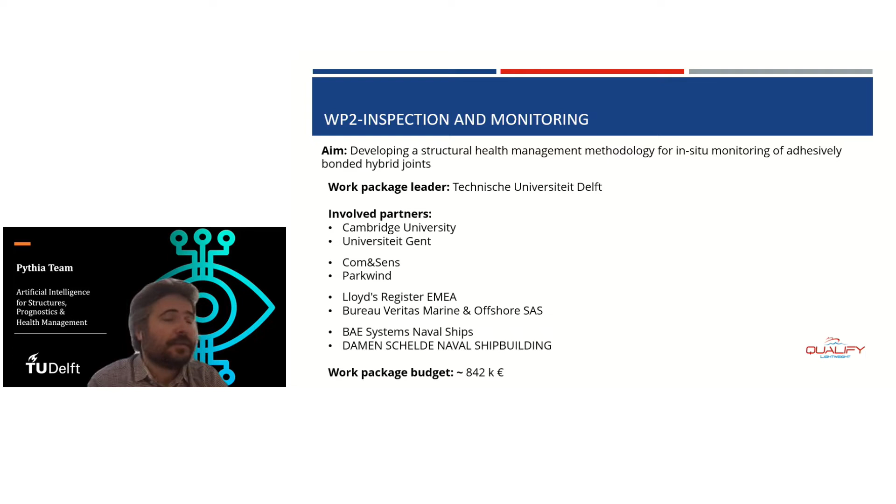So I would like to start the presentation by presenting, for those not familiar with structural health monitoring, the four different levels that exist. In the first level, what we are trying to answer is the question of whether there is damage, yes or no - this is what we are trying to do. On the second level, we also try to add the severity of damage.

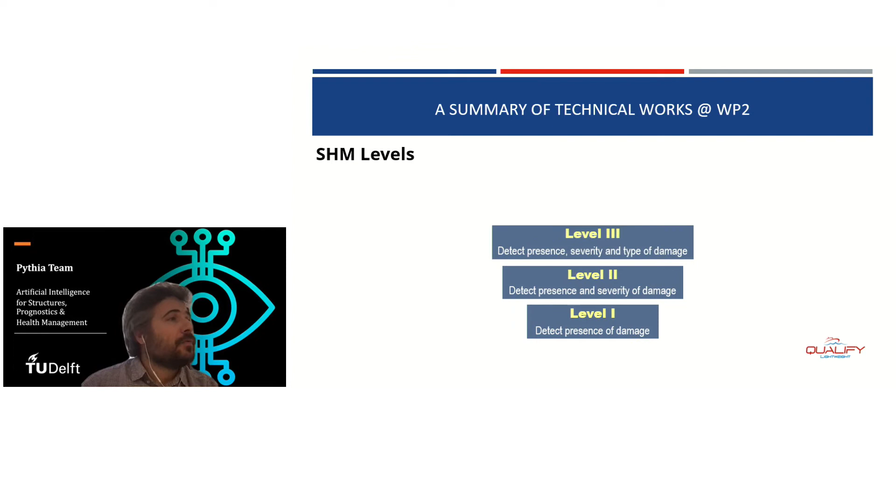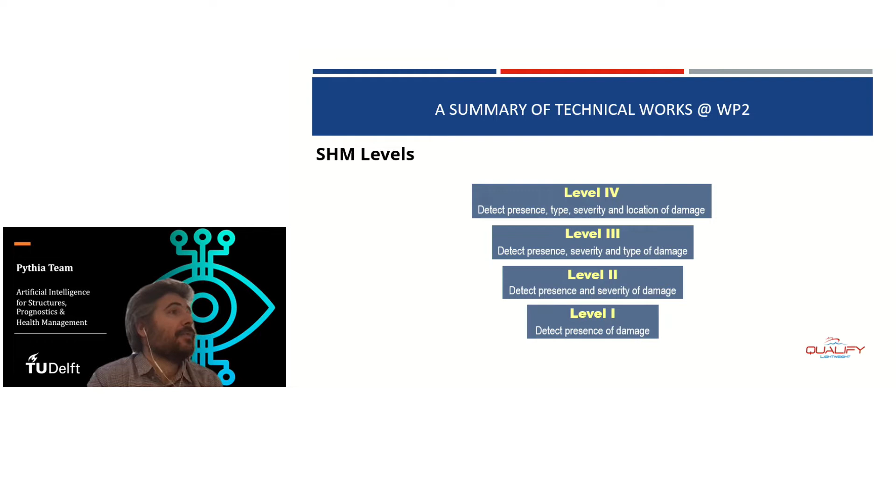As we go to the third level, we would also like to identify the type of damage. And of course, the last one, which can conclude the goal of SHM, is that as long as we're talking about the structure, we also need to find the location - that's also very important. So these four types - answering if there is damage, the severity, identifying the damage type (we're talking about a composite structure with many different materials), and the location - are the four levels we are trying to achieve here.

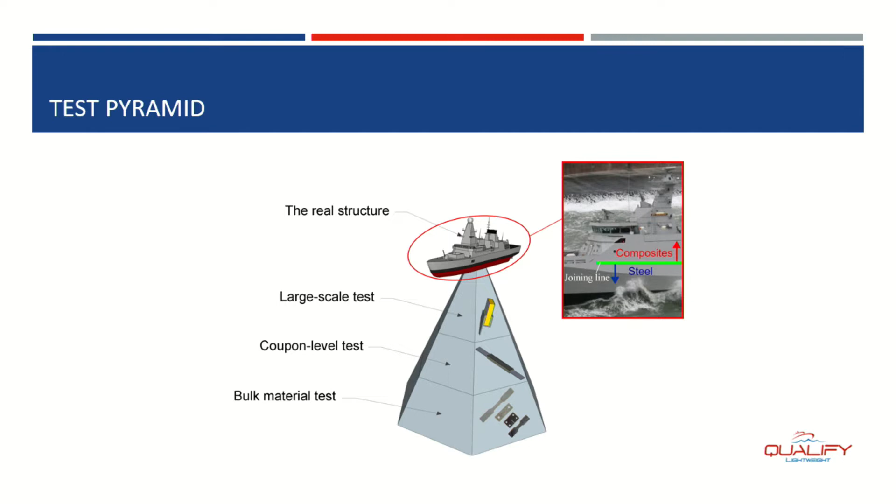I guess you have seen these slides several times. We are going to focus on the coupon level for the beginning, and I'll show you why there's a need to go lower to the bulk material, and also how we can go to the large scale test.

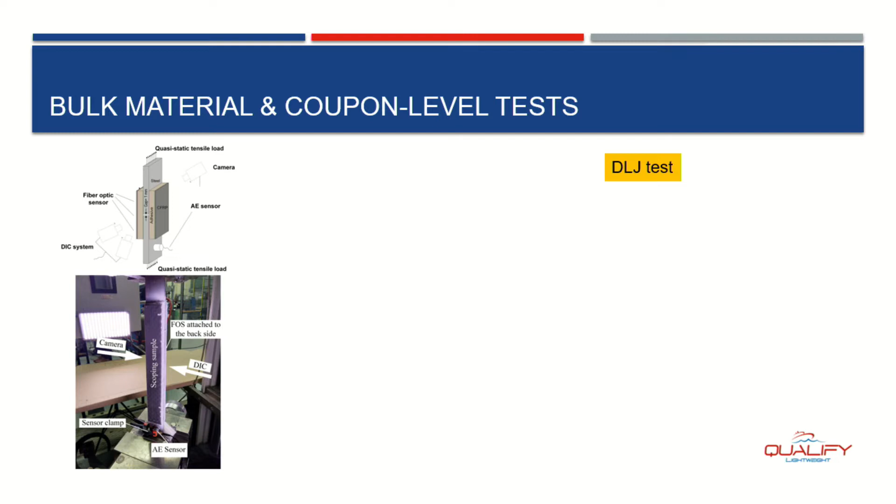Starting with the coupon level test, so the second level from the previous - what you see here in the picture is a double lap joint test that we performed at TU Delft. In the sketch you see the different materials, and in the picture below it, also the type of instrumentation we use - acoustic emission and digital image correlation - to measure the displacement field.

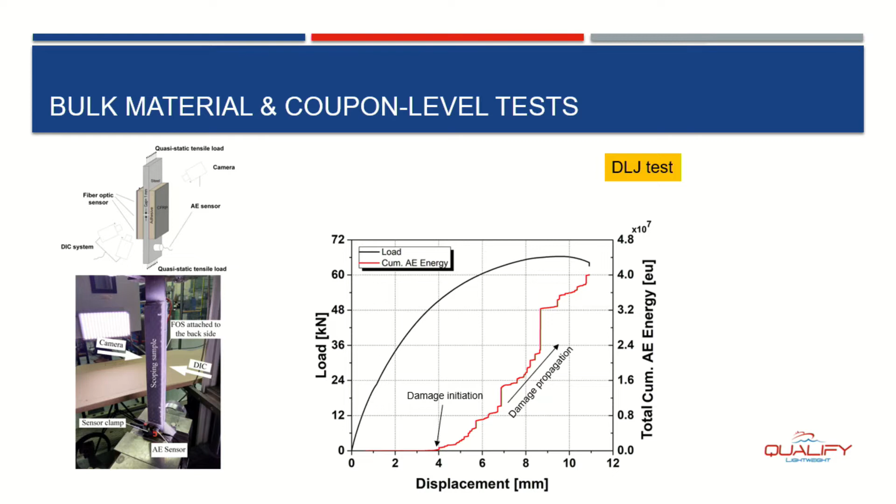The first result we obtained from acoustic emission is the following: together with the load, we can also capture the acoustic emission activity. One good health indicator in this case is the accumulation of acoustic emission energy. What we see here in this graph is actually very interesting - we can identify where and when in the load spectrum the damage initiates, with load and displacement, and how it propagates.

So we can see also the severity, and we can say that we can already identify level 2 - the presence of damage. We find that, okay, the damage starts to occur at this level, but also the severity, how it propagates until final failure.

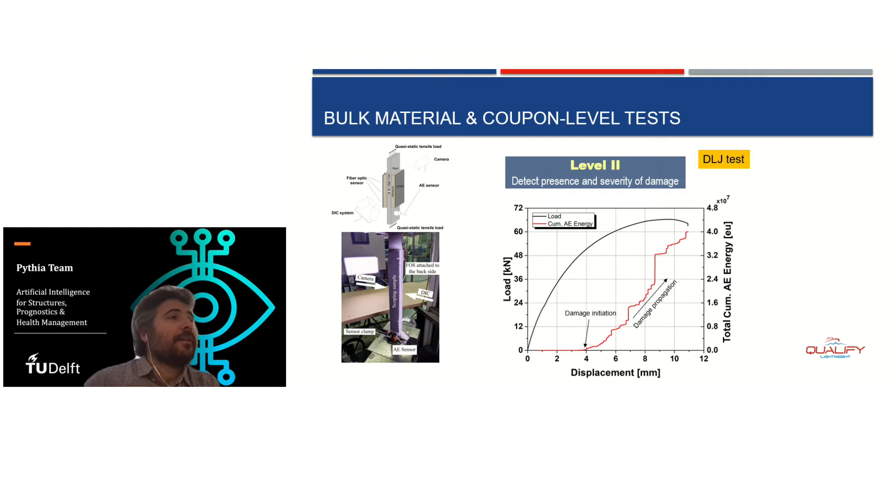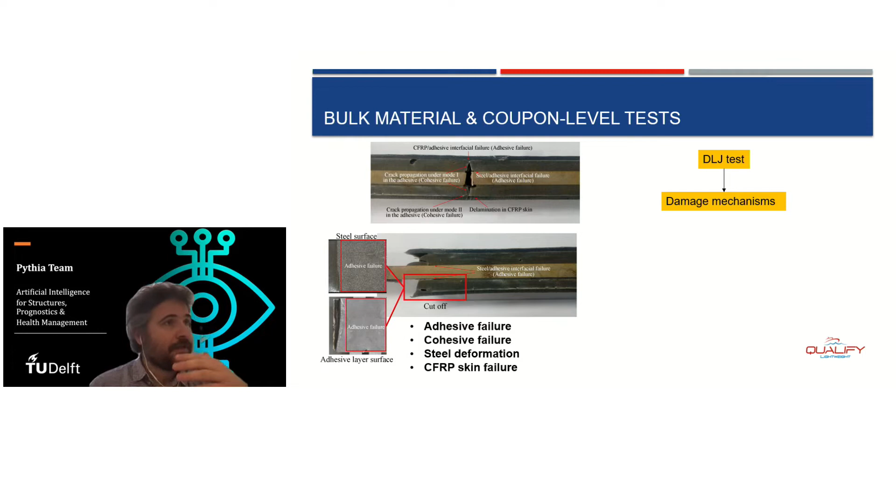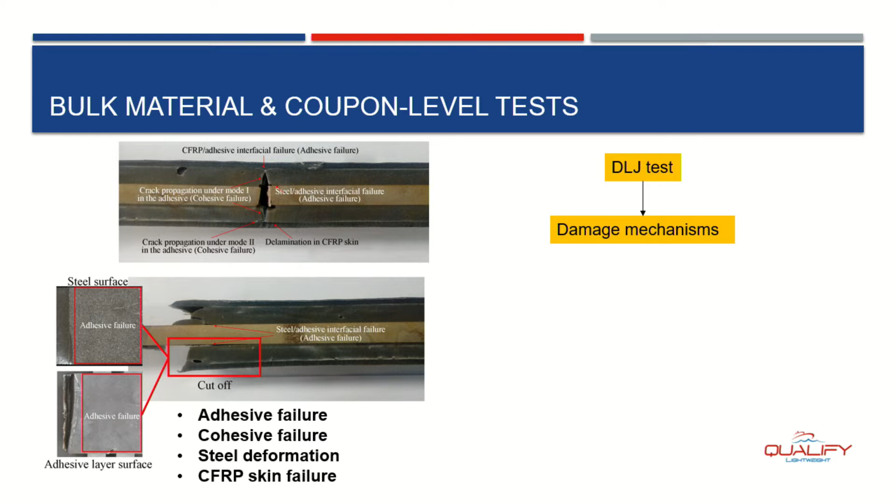If you still remember from level 3, we also try to identify the damage type. We're talking about different materials here, and the identification is quite important. What we have seen from the tests, when we check the failure pattern afterwards, is different failure modes - like adhesive failure, cohesive failure, steel deformation, and CFRP skin failure.

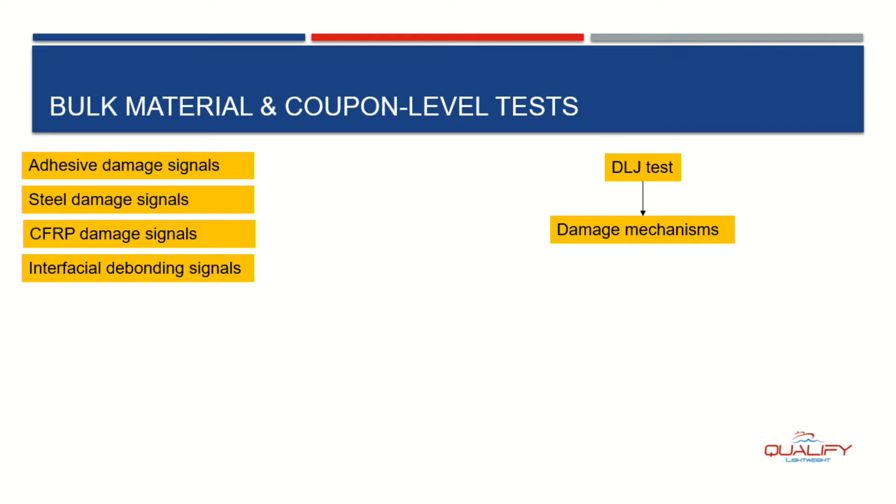So these are the four, so to speak, damage mechanisms that we identify. In order to be able to find how they evolved during the loading process, we need to build classifiers. This is very important. So as I said in the beginning, from the coupon level we had to go a level below, to the material level, so to speak, to the bulk material. These are the tests we developed in order to acquire acoustic emission signals or classifiers, as they are called. Depending on the four different damage mechanisms, we developed the tests accordingly in order to build our test classifiers.

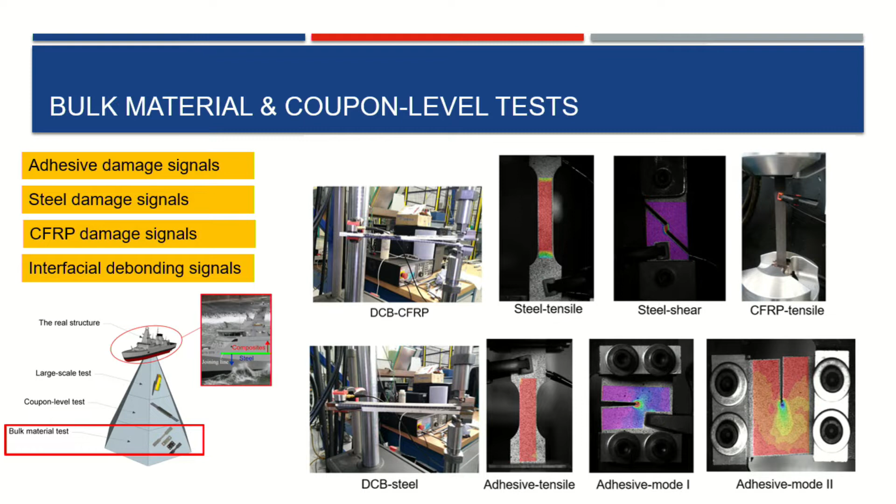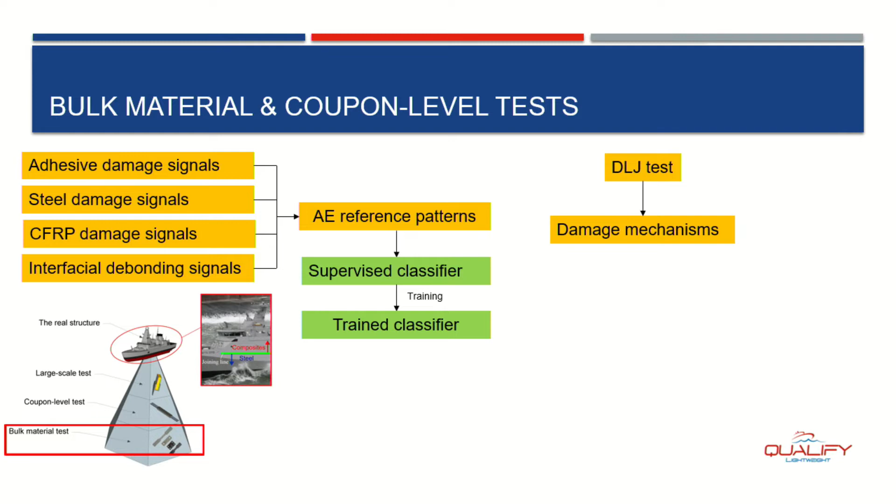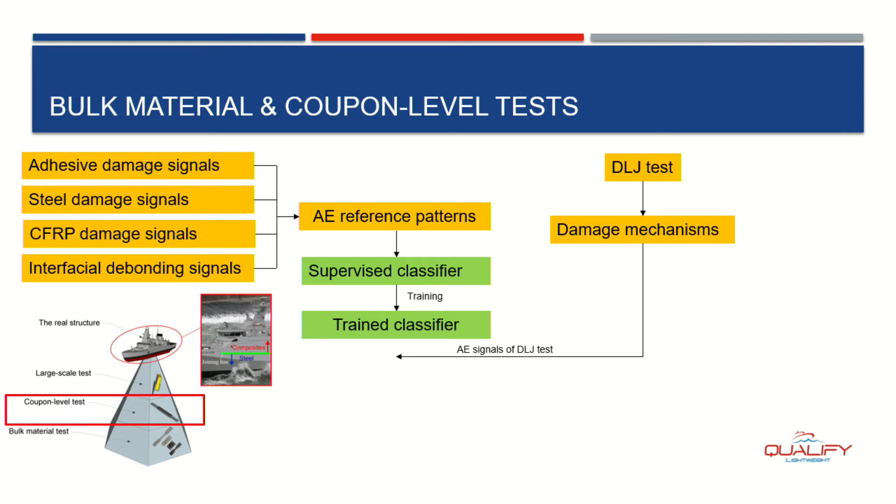So we have the acoustic emission classifiers or reference patterns. The next step is to build, as we call it in the machine learning training world, a supervised classifier, and then we train this classifier. From the moment we have acoustic emission from the coupon tests, we can correlate and compare the different types of signals, and perform classification.

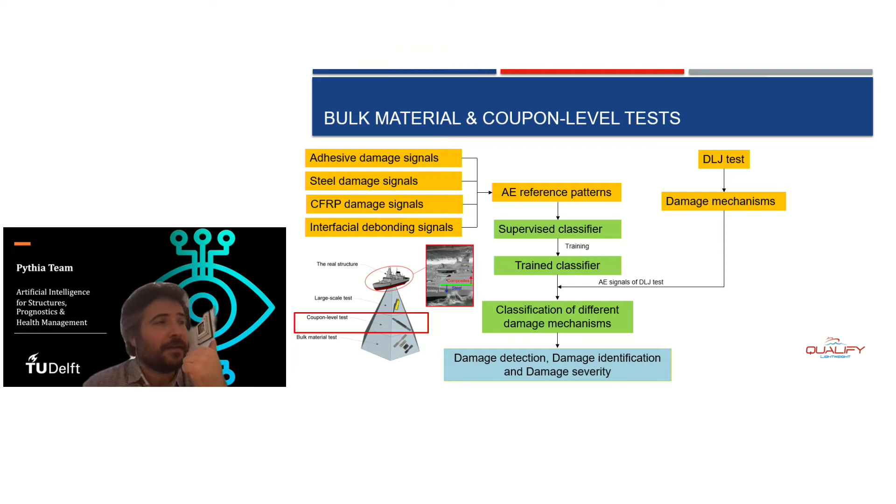This classification results in damage identification, which also fulfills the third level of SHM. So in this graph, you see now the different four levels.

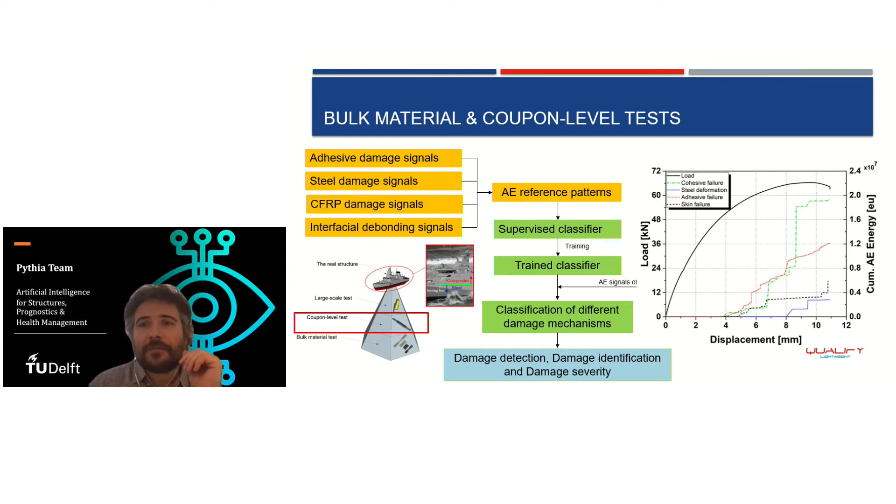I don't know if you can also see the pointer there. Hopefully you do — if not, it's activated on my screen. Hopefully it's activated also for you. If not, I do think that we have the different labels. Great.

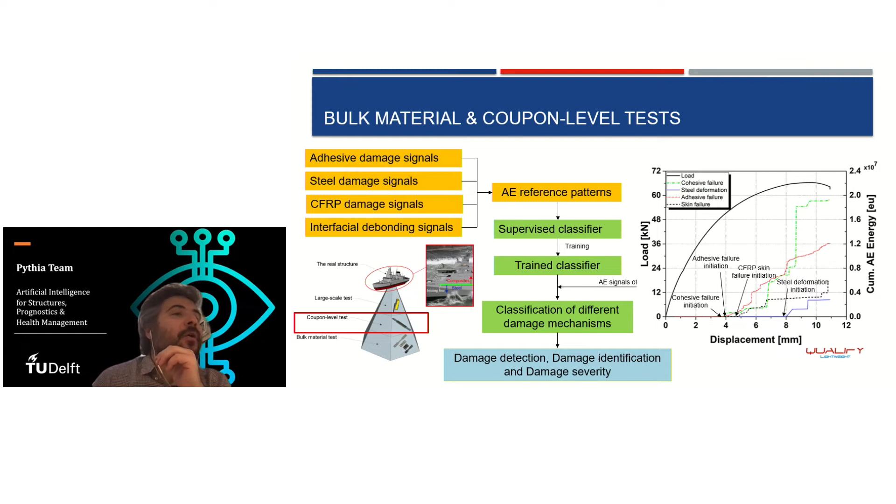So what you can observe already is the different damage mechanisms and how they evolved over the life of the specimen. One conclusion from this test is that actually all of them start really at the beginning, at 4 millimeters of displacement — besides the last one, where deformation initiates at almost double the deformation, which, in all honesty, we were expecting as well.

Somehow, let's see — okay, so this is level 3.

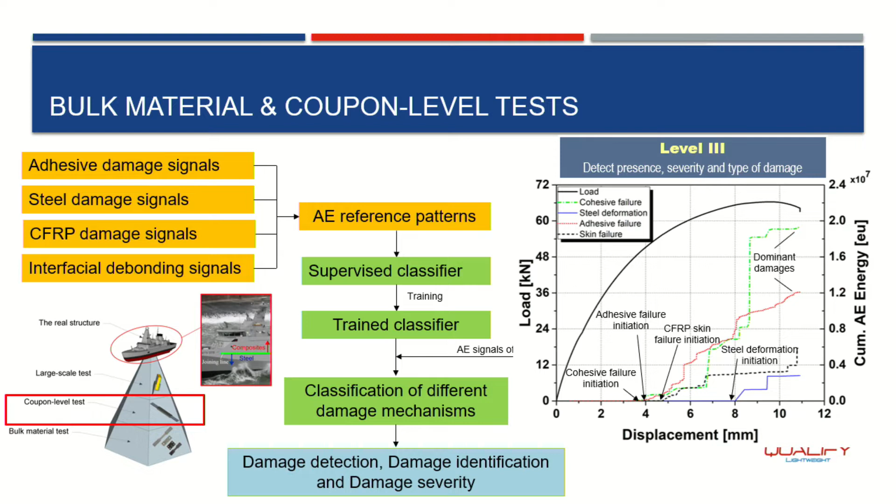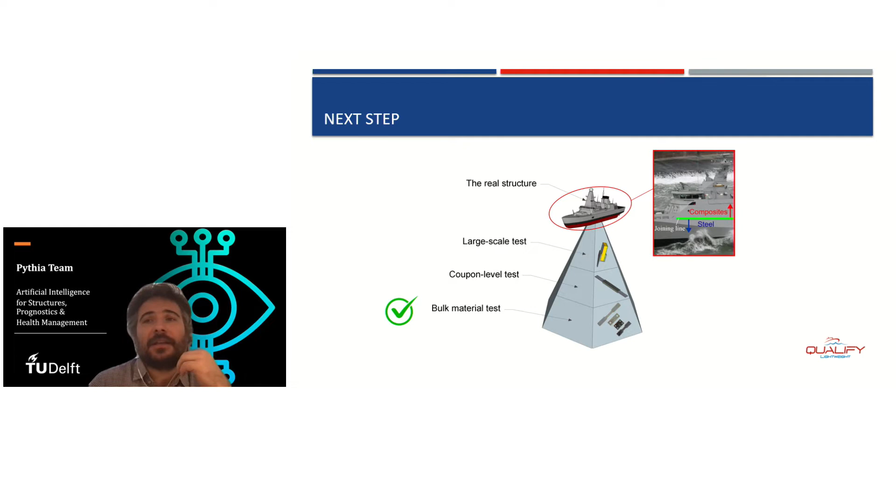As I told you before, one thing we need to do is fulfill the four levels of SHM, so we do care about the real structure. For the real structure, we tested it — so let's skip this part and go to the most important thing: how the structural subcomponent looks like, and the different SHM techniques that we used.

We have two types, the non-cracked and the cracked one. In the cracked one, just to see the difference, there is a crack here where we would like to initiate the damage. Besides acoustic emission, here on your right you see the topology of the sensors — the 5 sensors that we used.

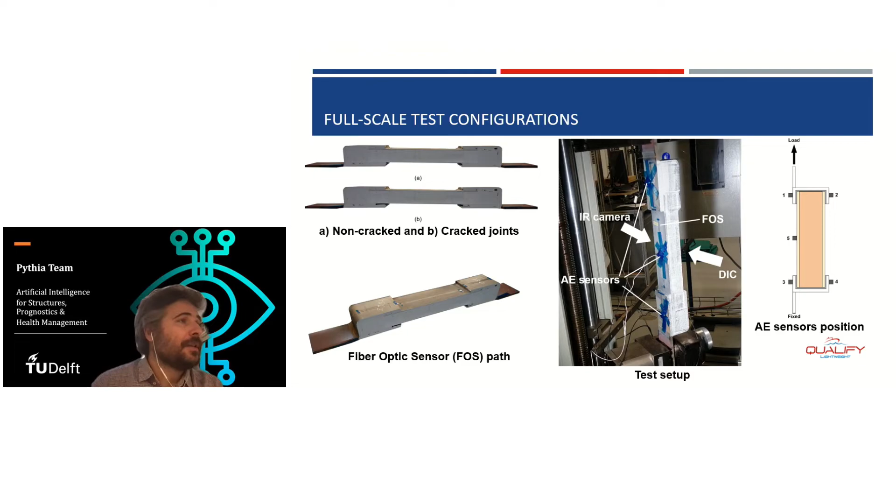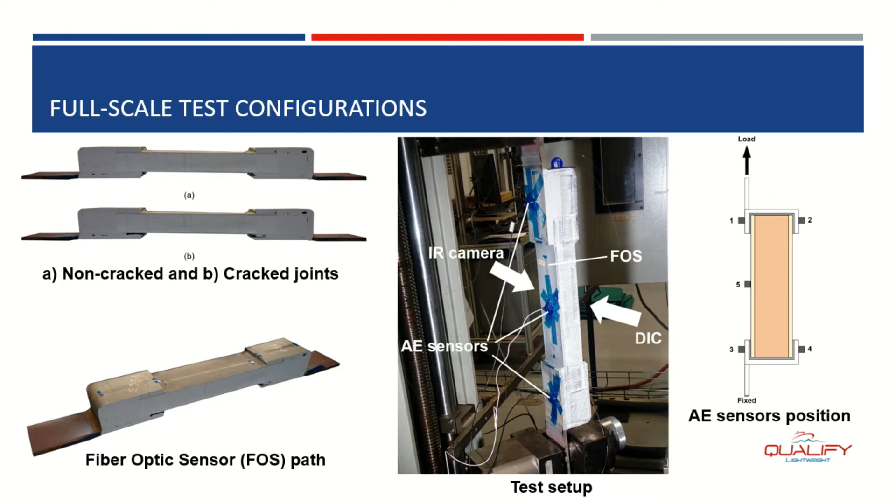We also used a fiber optic sensor, besides the DIC, to measure the strain field along the length of the joint. This is the way that we did the test.

These are the loading conditions. All the time we did it in displacement control mode. We did 5 load cycles, meaning we loaded, unloaded, and reloaded. The reason we did that was to be able to measure, during this load-unload-reload process, the severity of the damage that already existed in the specimen.

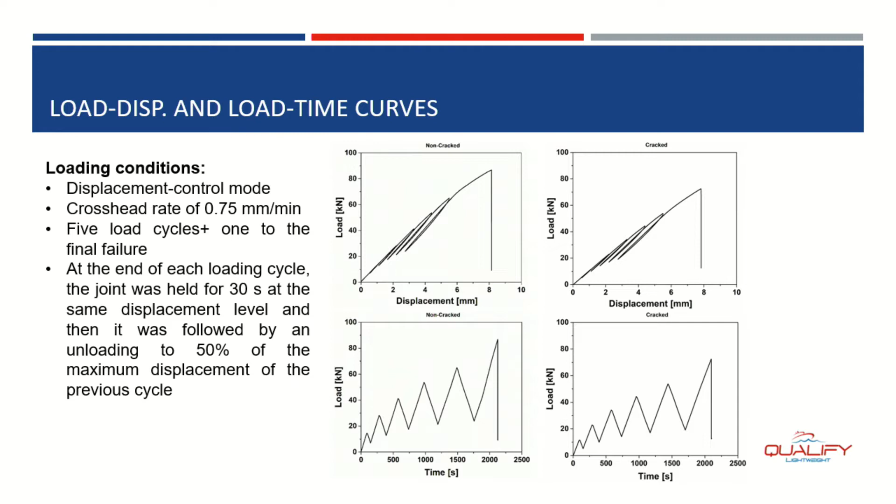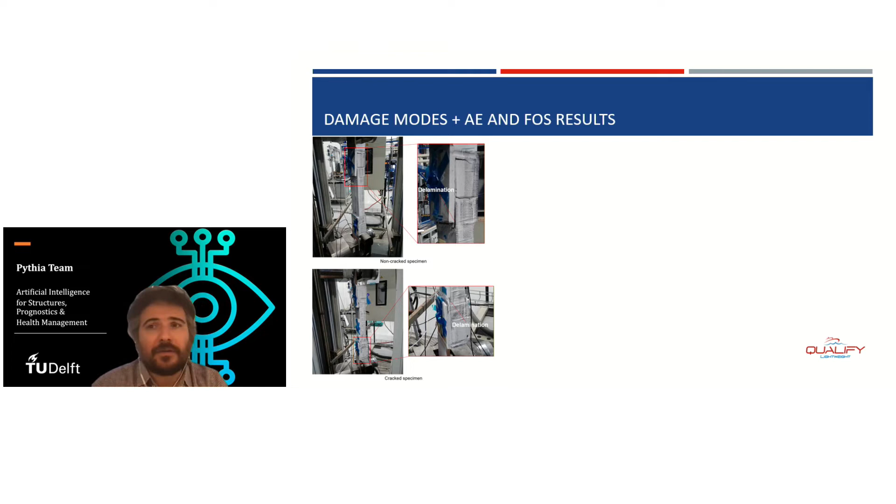So some results from the two different components, the cracked one and the non-cracked one — you see also how the specimens fail. And these are the results that we got from the optical fibers.

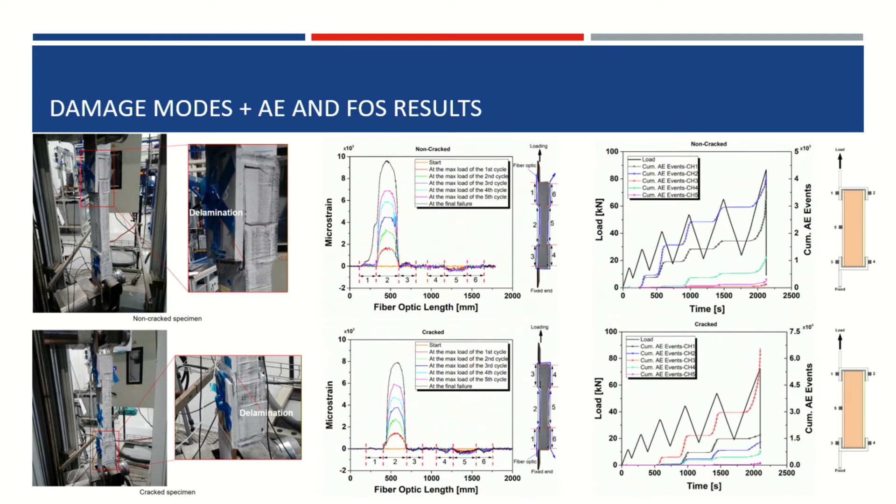For the different load patterns — we have 5 load patterns — you see how the strain behaves along the length of the fiber, as you remember from one of the previous slides, and where the crack and the damage was. The peak that we observed changed with the progression of damage, and also the acoustic emission activity changed through the loading and reloading process.

As I told you, we decided to install 5 sensors, which gave us the best overview of the structure. With 5 sensors, we could record the entire structure, and this is how you see the activity — the cumulative AE events per sensor.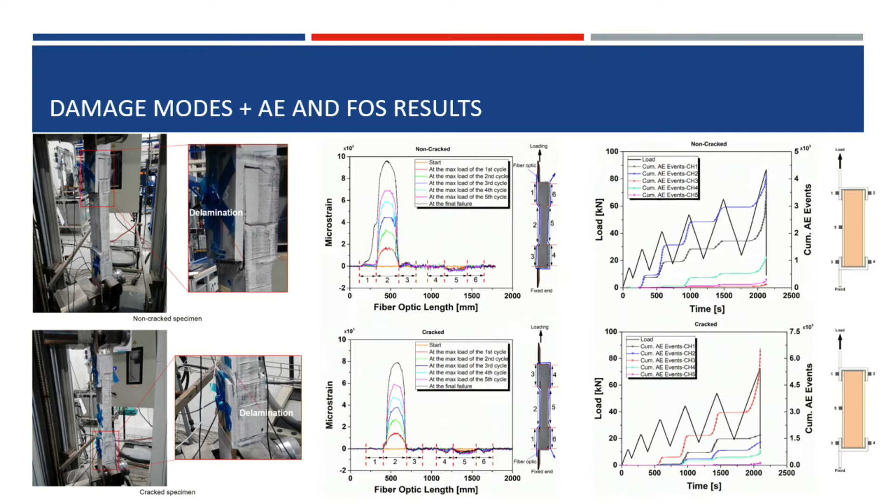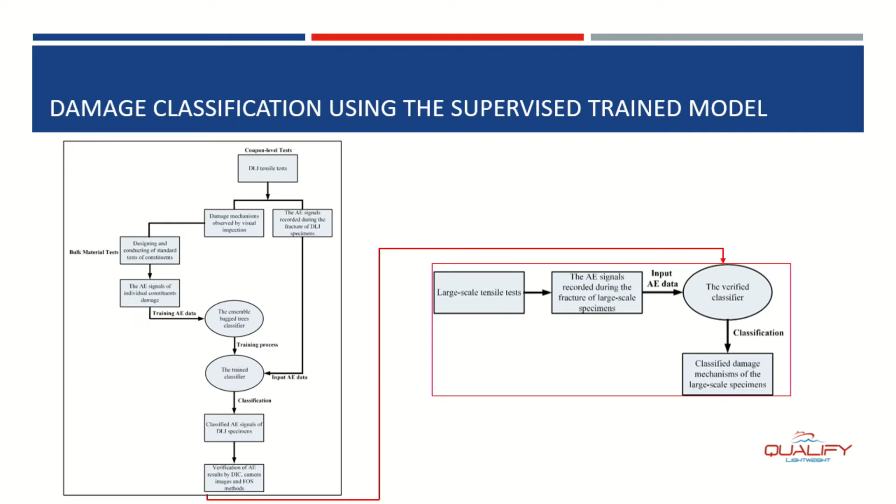Once we have that, we need to go back and try to answer the 4 levels of SHM. On the left part, you see what we have done already with the training, and the red part is about the classification and location of the damage. These are some of the results that we got, which I would like to share with you today.

One thing that you can see is how the different failure mechanisms evolve during the load, unload, and reload process for the non-cracked and cracked specimens. What we observe for the non-crack, the left graph, is that cohesive failure is the dominant one. You see it exceeds quite a lot the cumulative. Of course, at the end, everything peaks because everything breaks.

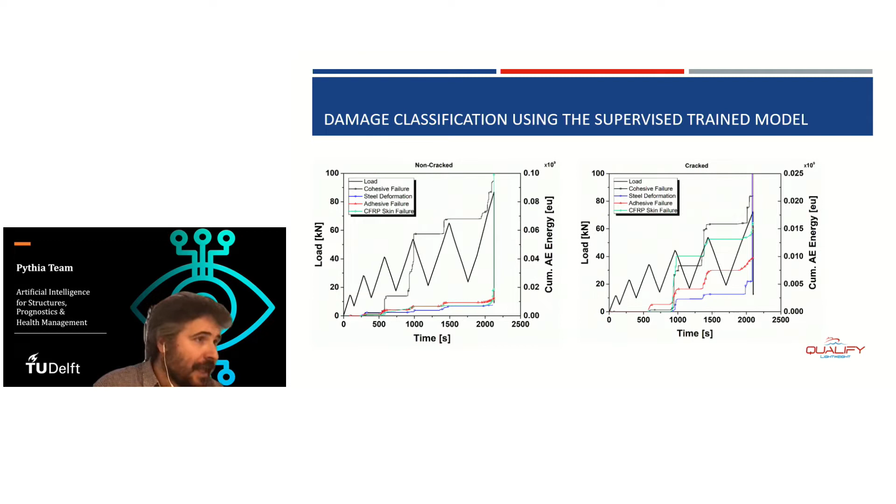So you can imagine that is a rupture failure, and the acoustic emission there records a lot. But up to, let's say, the last loading before the failure, we see that the dominant mechanism is the cohesive. On the other hand, for the cracked one, we see that the other three mechanisms also play an important role, with the most one also for the CFRP, and this is something that we managed to identify.

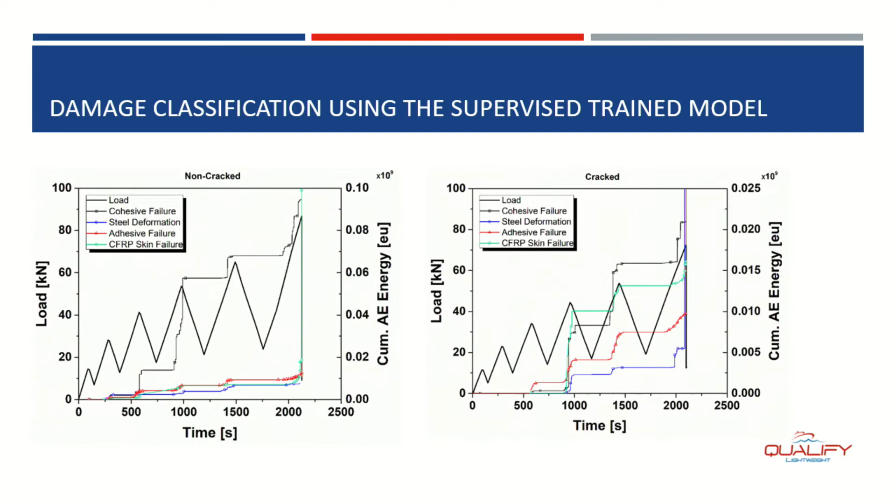That was about the damage classification, so the 4 levels of SHM. Now I would like to go to a bit different topic, because one of the things that work package 2 had to do is also to describe the protocol, and I do have a couple of minutes still to say a few words on that.

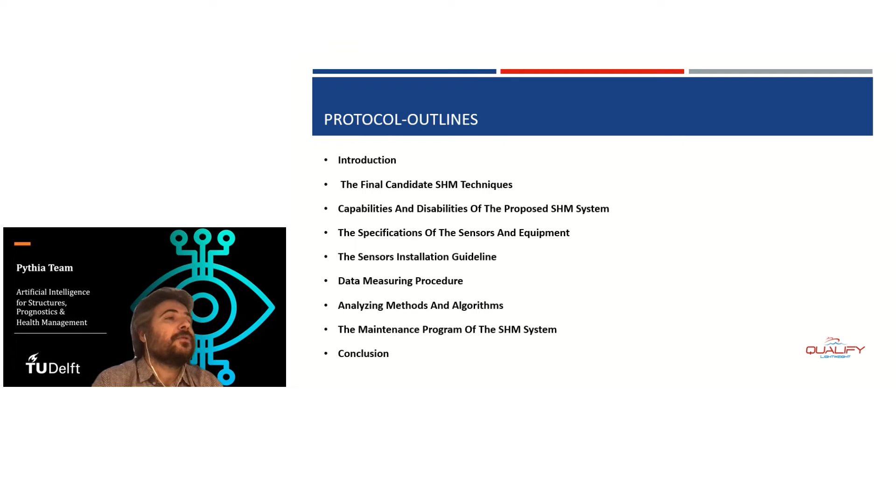What you see here is the protocol outline and the deliverable that we have already delivered to the partners—these are the topics that I would like to discuss with you today. So, for instance, if someone wants to implement an in situ monitoring technique or structural health monitoring technique, these are the things that we do believe need to be taken into consideration before deciding which technique to use.

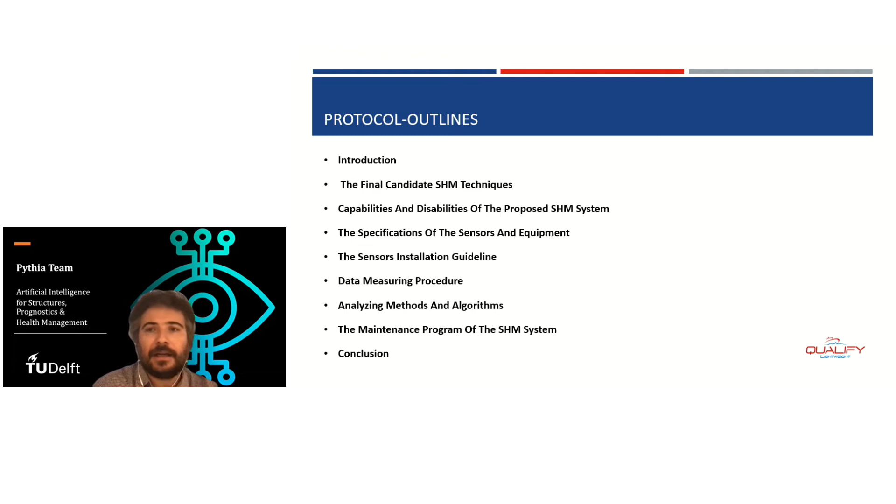So, based on the laboratory tests that we performed for this project—something I didn't say at the beginning—we have 7 SHM techniques. Nevertheless, we decided that acoustic emission and FBGs, the optical fiber measurements, were selected for monitoring the real structure, due to the following reasons.

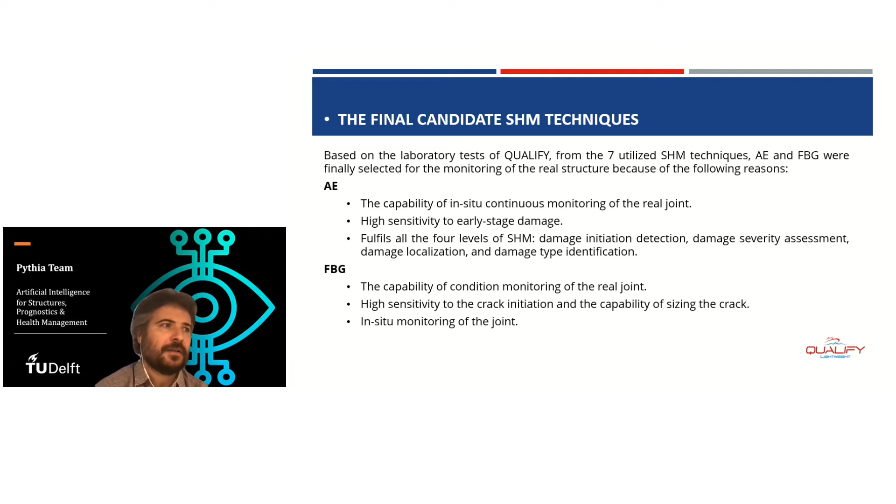First of all, for acoustic emission, the capability of monitoring continuously is very, very important. It is very high sensitivity—sometimes this can also be a downside, but in this case let's put it as a plus—the high sensitivity to early stage damage, and it fulfills all 4 levels if someone follows an approach that we propose or a similar approach: initiation (if there is damage), severity, localization, and type identification.

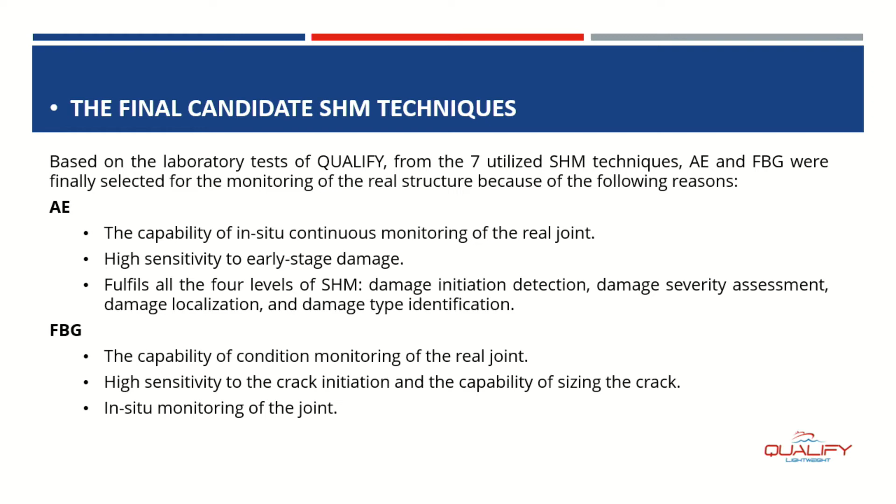The FBGs, for condition monitoring, again very high sensitivity, and of course real-time measurements. So for the capabilities, just to focus a bit more on the acoustic emission, what we have observed from the tests is that we can detect damage at a low level, more or less 30% of the maximum failure. So we believe it's quite early.

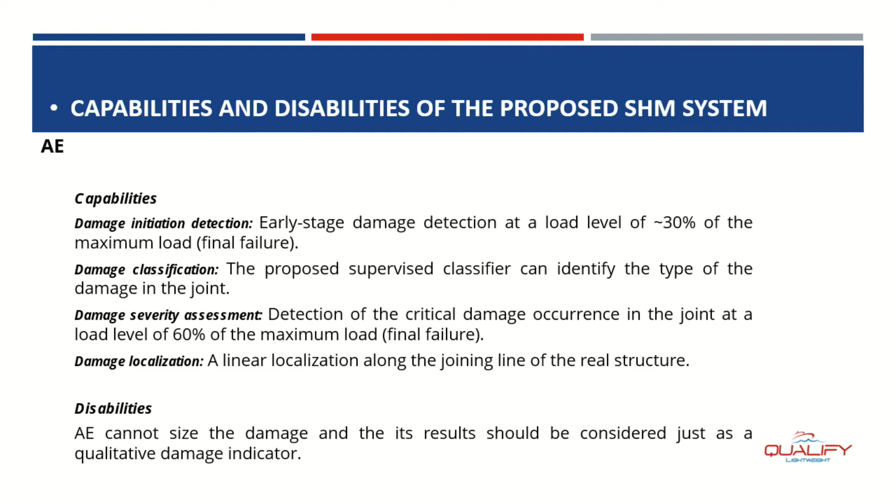By using a supervised classifier, I can identify the different types of damage in the joint. Nevertheless, I have to say that in order to build a supervised classifier, you need quite some experimental effort, as you saw. We need to test each material separately in order to have acoustic emission signals, and if someone follows the supervised classifier approach, this is the only way to go.

For damage severity assessment, we've seen that the damage is quite severe, up to the level of 60% of the final failure. And for damage localization, we implement the linear localization algorithm—I'll show you a bit later how it works.

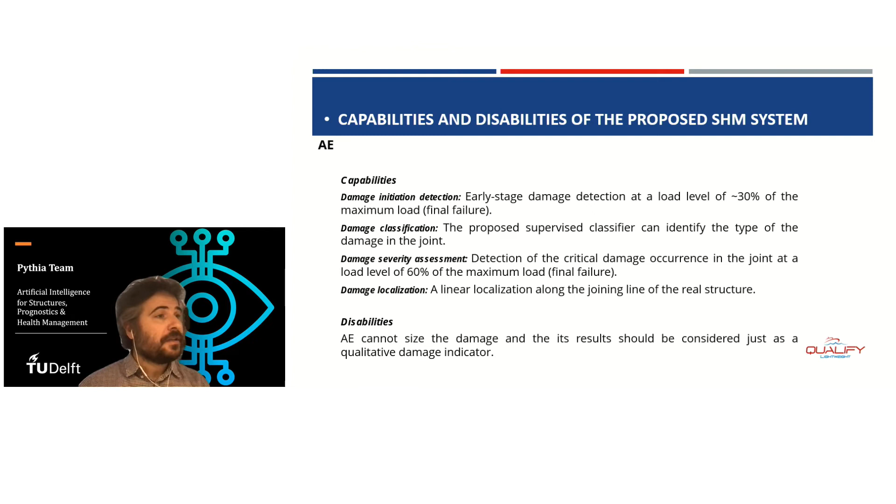The main disability of acoustic emission is that it cannot size the damage—we cannot say how big the damage is. Of course, with a combination of FBG or maybe another technique, either in the regime of SHM or NDT, with a synergy, we can also size the damage.

Now, the sensor installation guideline. We need to determine the maximum allowable sensor-to-damage-source distance. This is important, and it also applies to how many sensors we would like to put into the structure in order to optimally monitor the part that needs to be monitored. As I said, for the full structure, we did it with 5 sensors. This is an exercise that someone needs to do for a specific structure.

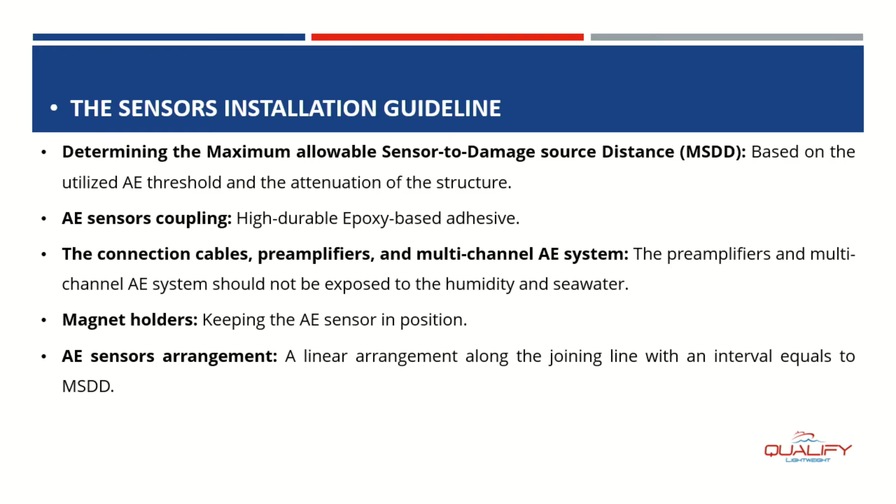We need to ensure that there will always be a very good coupling between the sensors and the structure. There are some specifics about the connection cables and the preamplifiers—we know from tests that they should not be exposed to humidity and seawater, so this needs to be taken into account. Sometimes magnet holders—hopefully the industries working with acoustic emission have developed these magnet holders—help to keep the sensors in position.

And depending on the localization algorithm that you want to do, it's advised that in most cases you have a linear arrangement between the sensors.

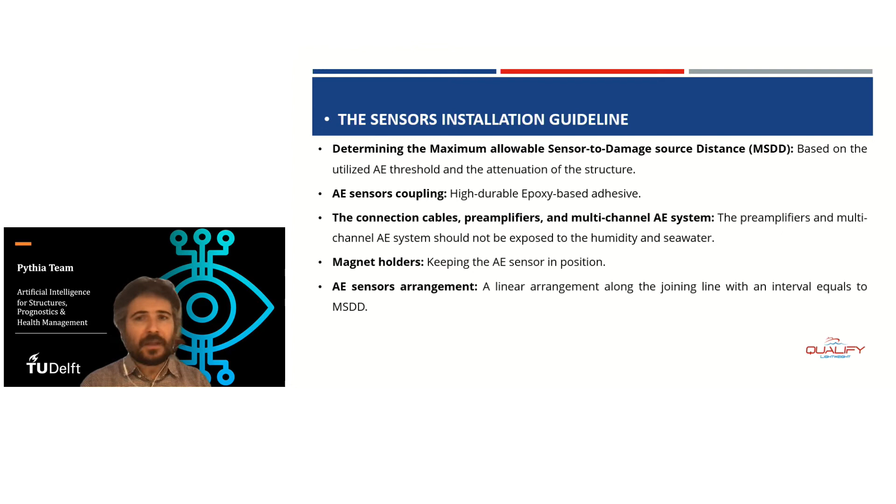For the data measuring procedure, what we have observed is that we always need a level plus 6 dB higher than the environmental noises. So we need to measure the environmental noise, and the good practice is to add 6 dB.

The sampling rate is also important because this defines the amount of data we will have. Depending on the material, for instance for a CFRP, we know that when it breaks it emits a signal in the regime of 500 kilohertz. So according to the Nyquist theorem, the sampling rate should be at least 2 times that, so at least 1 megahertz. To be safe, we usually go from 2 megahertz and upwards.

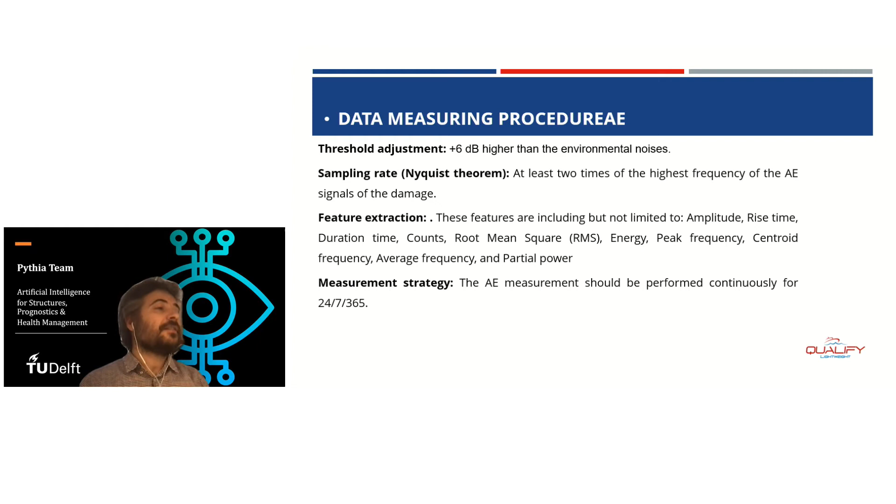For the feature extraction, when doing real-time monitoring, you want to visualize results, such as the cumulative energy that you can see in real time. These are the features that we propose someone needs to have when measuring. And of course, the strategy, as I said, should be continuous. That's very important.

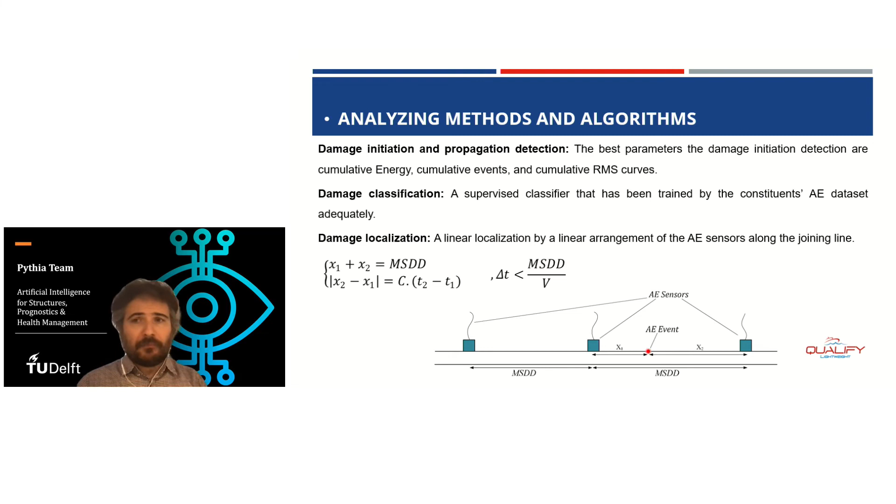These are for the localization algorithm that someone can use. It's very straightforward as long as you know the speed you have measured before, and the sensors measure the time a signal has recorded. You can then also measure the position of the source. That's the principle.

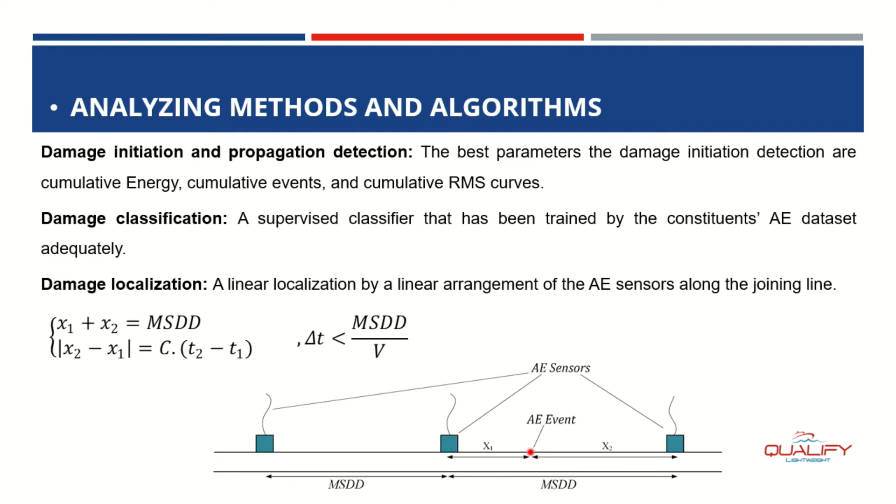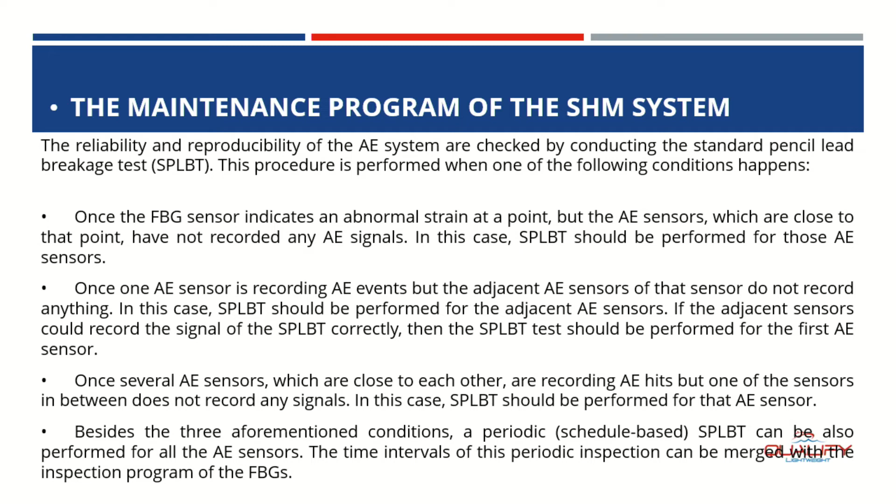Going towards the end of my presentation, one important thing to talk about is maintenance. Maintenance is very crucial, because once we have installed the system, that's the principle of the SHM technique, it needs to be there permanently. Nevertheless, we need to go back to the system and check that we can still get results in a reliable and reproducible manner.

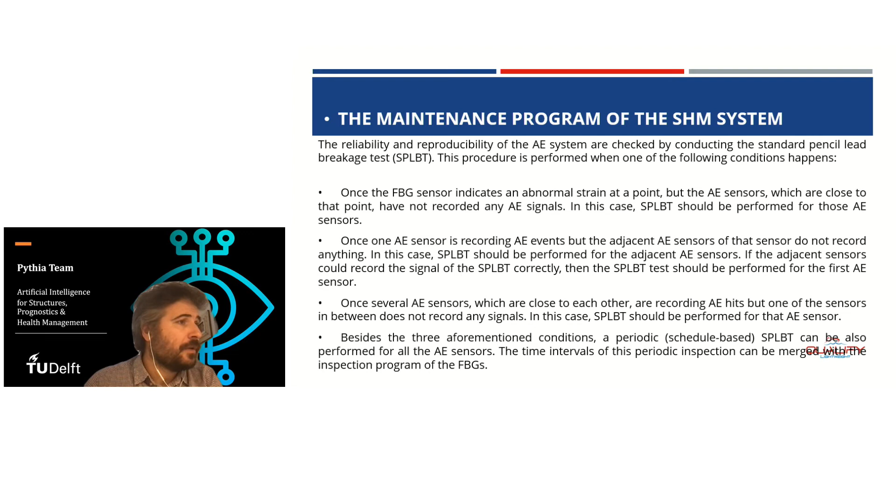These are different observations that we propose to the user. I don't want to go through each one of these, but the main message is that an SHM system also degrades over time. It is a system that degrades, and we need to take care of it.

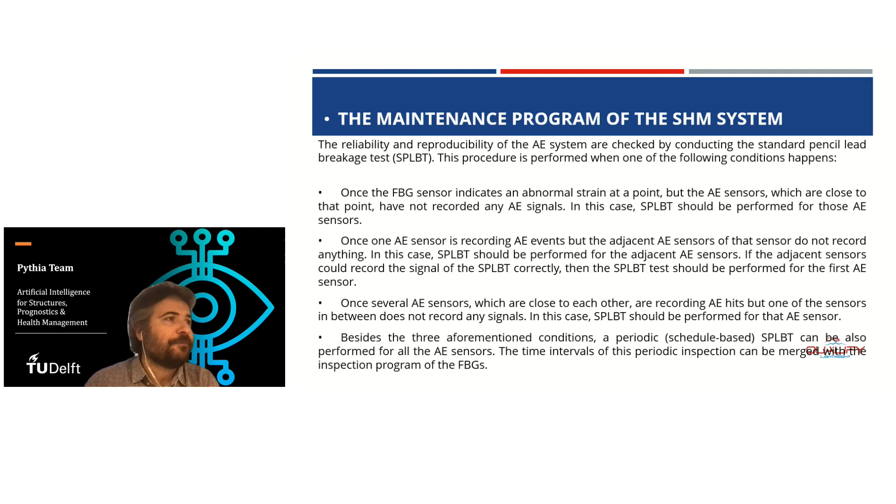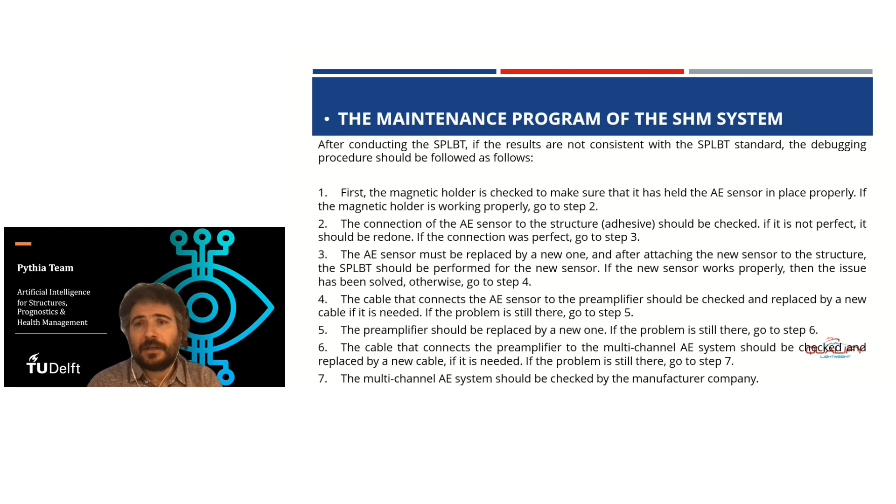With that, I would like to conclude my presentation by showing some of the deliverables that we have, or the dissemination. Several journal papers are mentioned here, and some others are in progress, like the last one. There are also conference papers developed together with my TU Delft colleagues, and also colleagues from the Interreg project, over the last 3 years.

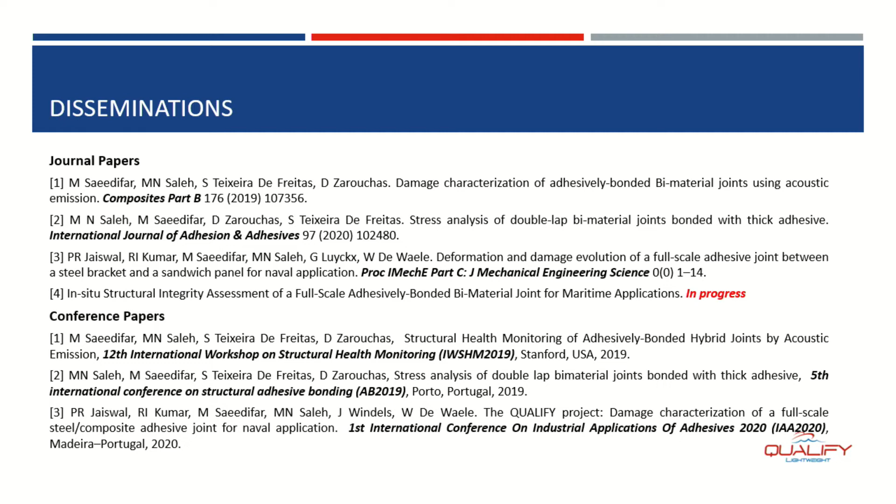With that, I would like to thank you for your attention, and of course I would be more than happy to answer any questions.

Thank you very much, Dimitrios. That was great. We have a question via the chat: first signals were measured at 60% of ultimate failure load. This shows that the system measures this while the joint integrity is not failing. Is that correct, or?

Yeah, because the failure is in progression. So the joint hasn't failed, but there is already damage, and that's why we measure it. At 60% load, the damage is quite severe. But as we've seen from the results, the acoustic emission technique can detect damage initiation even earlier, at approximately 30% load for different specimens. So in summary, it should be around 30%. I don't know if this answered the question.

Yeah, this is online. I think they need to confirm by chat. Do we have more questions, okay, maybe from the floor? Yes, please.

Maybe a question related to the noise levels and the noise threshold, because on board of a ship we try to minimize the noise, but you have a wide broadband spectrum of background noise from all the machinery running. Do you expect difficulties applying this technology on board a ship?